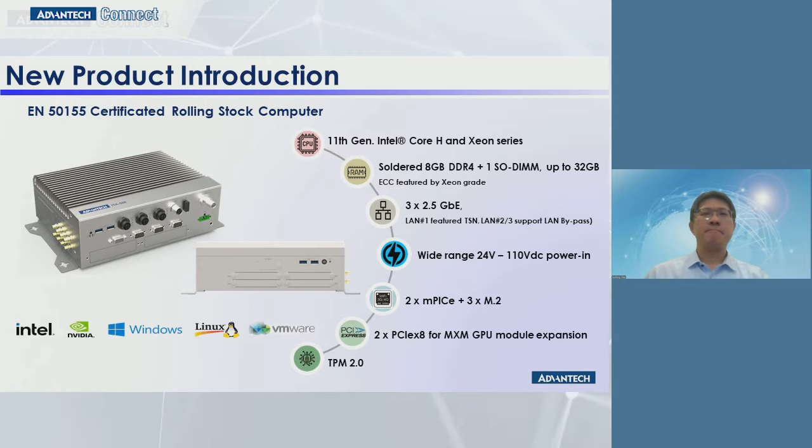Additional innovation is that we create an optional power backup module with supercapacitor to support certain power interrupt and safety system shutdown. This supercapacitor power backup solution can provide benefits on operating temperature and low maintenance cost.

From the operating temperature point of view, the whole system embedded power backup module can still comply with the EN 50155 regulations. Supercapacitor battery has features including fast charging and higher charging and discharging cycles to reduce the maintenance cost and provide better management for EN 50126 RAMS.

Railway operators adopt AI technology in order to enhance safety and operational efficiency. We will target three major solutions in rolling stock, including autonomous train, Internet of Trains, and people counting. The people counting market has seen high growth in recent years.

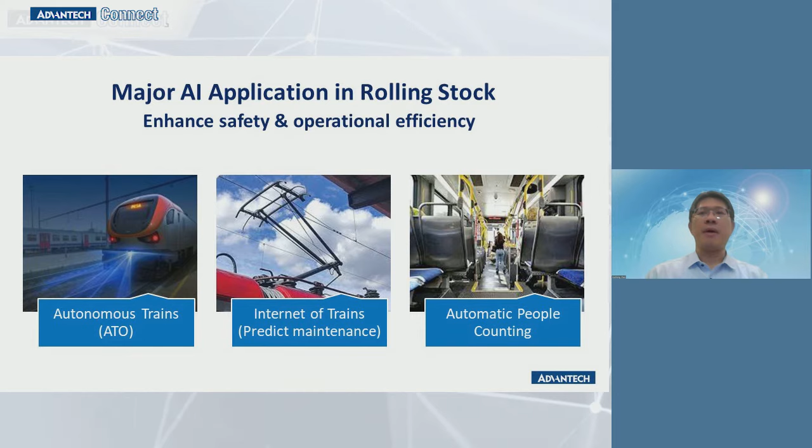People counting systems maintain the occupancy limit for social distancing due to the outbreak of COVID-19. The condition-based maintenance of wheel, track, and pantograph also helps optimize asset management. AI technology is starting to break away from static rule-based programming inference systems, using dynamic learning for smart decisions.

Advantech AI technology combined with IoT technology is now redefining smart rail applications. Edge computing offers a big advantage in distributed architecture, handling large volumes of real-time data. Moving all the data into the cloud or server for analysis creates networking and storage challenges, impacting both bandwidth and latency.

Localized processing close to the data source, such as pre-processing with AI, can reduce those bottlenecks, lowering the networking and storage cost.

In AI edge GPU solutions, Advantech offers two kinds of solutions. First, Intel Core i or Xeon platform plus NVIDIA MXM GPU solution, and NVIDIA Jetson Orin solution. We offer ITA 560 and ITA 510 for AI Jetson applications.

Those two models are powered by NVIDIA Jetson Orin NX, with built-in vehicle communication bus such as CAN bus or MVB bus, and wireless connectivity including 5G and Wi-Fi 6 technology.

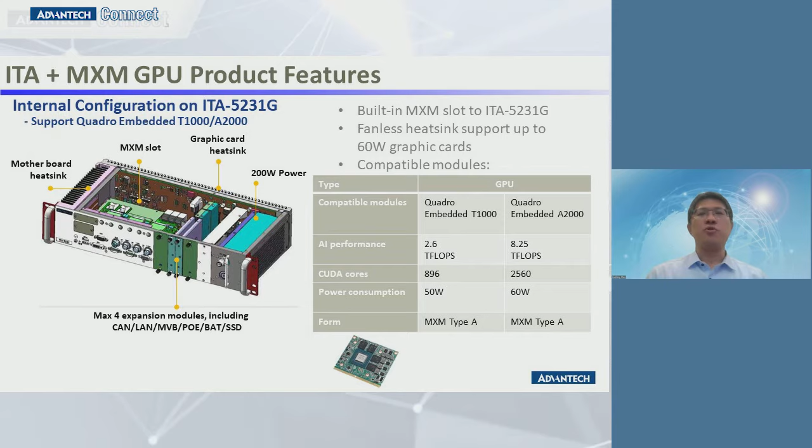Today, we will share two success cases with AI applications. One crucial part is the pantograph-catenary resistance, which is directly related to the power supply safety of the train in high-speed rail. To ensure the safety operation of the pantograph-catenary system and eliminate hidden dangers during power supply to the train.

In China, an automated detection and monitoring system of the pantograph-catenary in high-speed rail will be deployed to timely discover and report potential issues and evaluate the performance of the pantograph-catenary system. They call this the 6C system.

The 6C system can measure the dynamic and static geometric parameters of the catenary and detect the different working states of the components, and the operation condition of the pantograph-catenary system, to ensure safe and reliable operation of the railway system.

This requires AI-based image processing capacity, and compliance with railway regulation is important for solution deployment. Advantech can provide Jetson platform and Intel plus MXM GPU platform certified for this application.

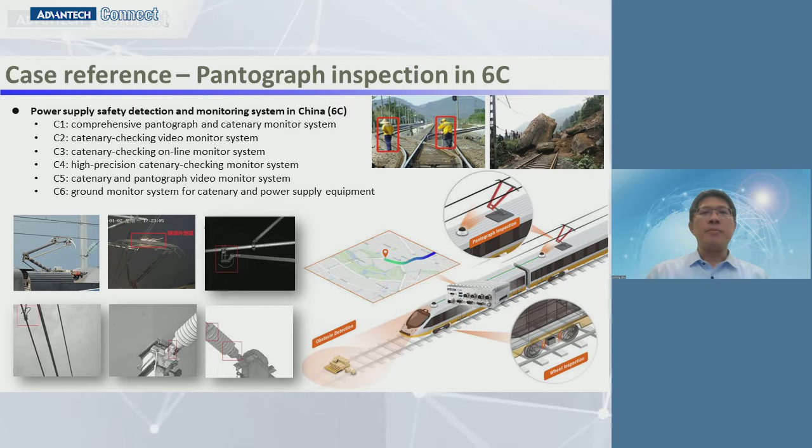For the second success case, a traditional people counting system is bundled with a door system, and its purpose is to calculate passenger volume and those getting on or off.

They usually use sensor technology to implement this on the door system, but it is hard to get awareness of the crowd data in each carriage.

Operators can pick up the easy way to upgrade the system with these features. First, there are CCTV systems in each carriage, and operators can leverage existing infrastructure equipment. They just need to use the onboard AI box, making it easy to adjust the algorithm to provide new services to passengers.

For example, in Taipei MRT, there's an app feature that shows how crowded your train will be. Through this app, you can see how crowded the next train is in real time. Crowd data is displayed for each individual car on the train, so you can avoid the most packed carriage, helping riders maintain social distancing.

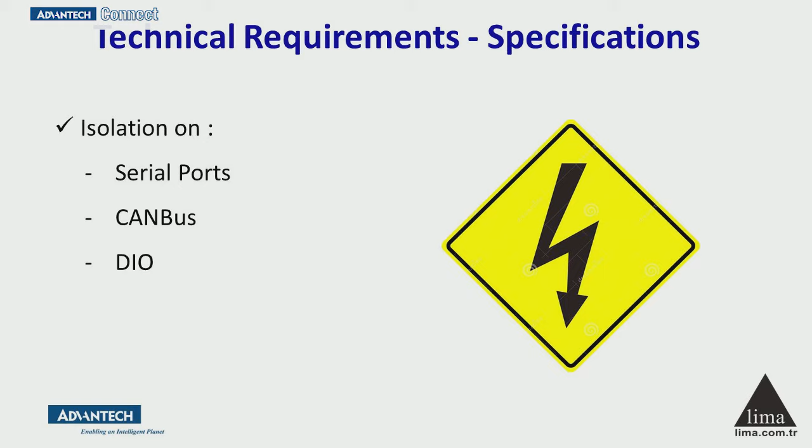As you know, reliability is perhaps the most important consideration in transportation applications, because equipment failures may cause catastrophic results. Linked to that fact, you will also see isolation is required for the communication interfaces. This is to prevent a direct electrical surge or transient power from damaging your system.

Especially for rolling stock applications, commercial connectors for the interfaces are all replaced with circular M12 connectors. M12 connectors are much more robust in harsh environments with high shock and vibration, and they also prevent dust and liquid from penetrating through the interface connectors.

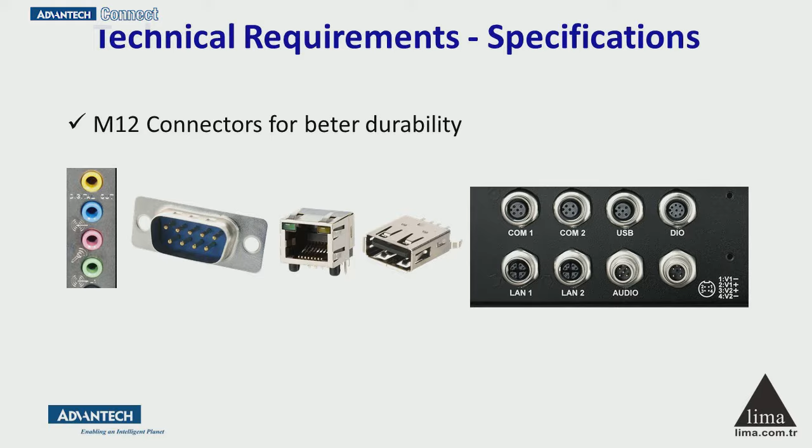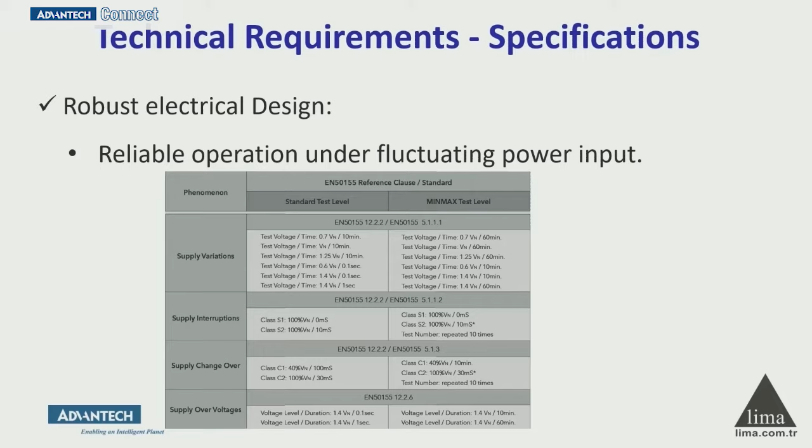The next one is the electrical design. The supply conditions in a motor vehicle or rolling stock vehicle are not as stable as in a typical factory environment. Therefore, the electrical design of the systems should be able to withstand supply challenges like fluctuating power input. For instance, in rolling stock applications, the systems should be able to operate between 0.6 to 1.4 times the nominal input voltage. In addition to fluctuations, supply interruptions for a certain amount of time should also be tolerated.

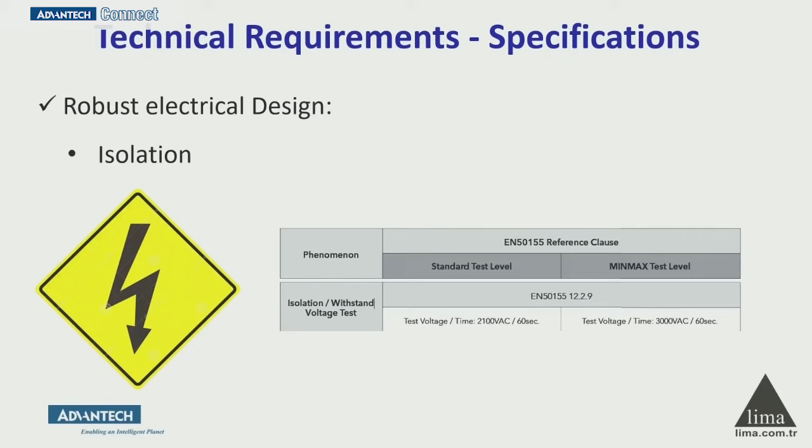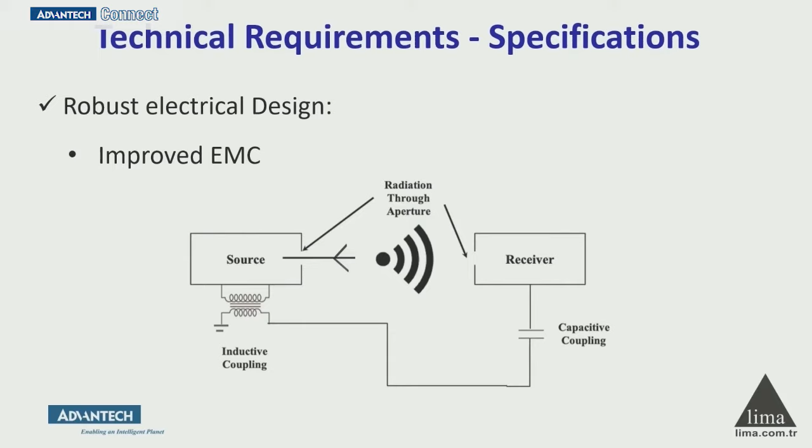Just like the interfaces, the power subsystem should have robust isolation in order to protect itself from power surges. The power module should not emit EMI in excess of defined levels and should be protected from outside negative effects as well. All these design requirements are explained or standardized in widely accepted standards like EN 50155.

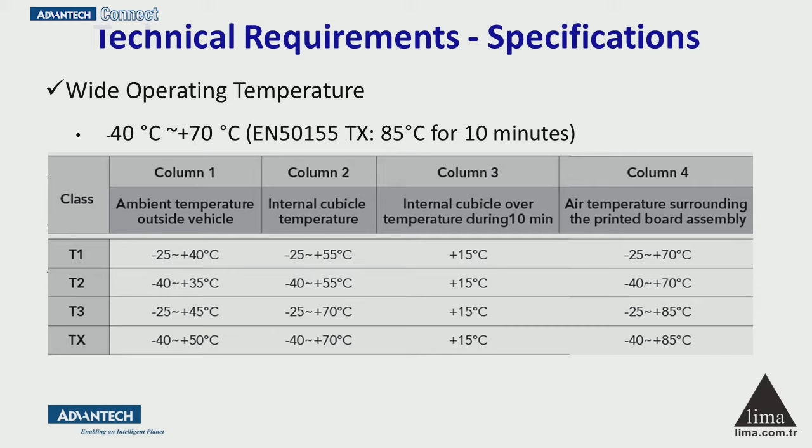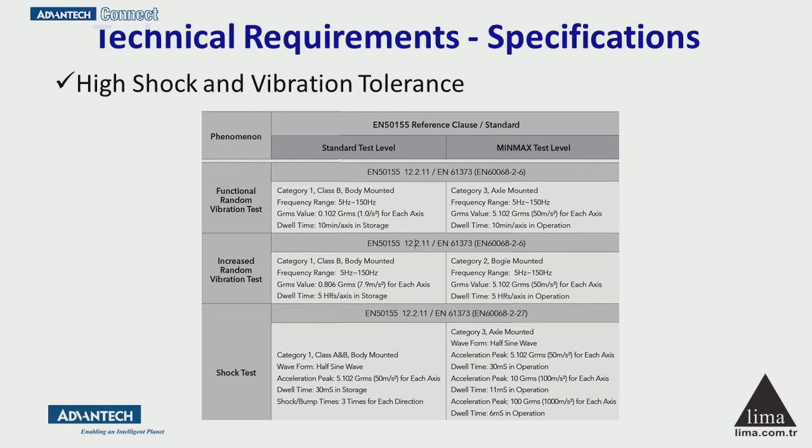Obviously, the devices should be able to work in extreme high and low ambient temperatures. Typically, they are expected to operate between -40 to +70 degrees. High vibration and shock tolerance is also a must, and the devices are tested against certain shock and vibration profiles to get certified. In addition, some special functions like programmable HMI buttons could be requested.

Finally, SDK availability for low-level access to interfaces like digital I/O and CAN bus, etc., and programmable functions like brightness adjustment, on and off delay control, function assignment to buttons is quite important during the product qualifications.

And the last but not the least is the certifications. The main ones here are EN 50155 for rolling stock and E-mark or E13 for motor vehicles. Apart from these two, typically most or all of the remaining certifications are also demanded. In summary, having the certification and test reports for the above standards means that the device you offered meets the unique electrical and environmental requirements of the application.

When it comes to the business side or project management side of things, early engagement is critical. There is almost no chance to win a project or tender if you only hear about it at the procurement stage. Due to the nature of the applications, the demands and the regulations are so strict. Therefore, the engineering teams prefer to thoroughly test and qualify the candidate products to make sure they meet all their needs. You should be prepared to invest in mid to long-term pre-sales support, because the qualification period could take anywhere between 6 months to 18 months.

Typically, a free of charge demo unit should be given, and the qualification should be followed up very closely for timely resolution to any reported issues. Of course, Advantech is your main help here. The dedicated PM and the engineering teams will evaluate the reported problems or even the customization requests and provide your client with a timely solution.

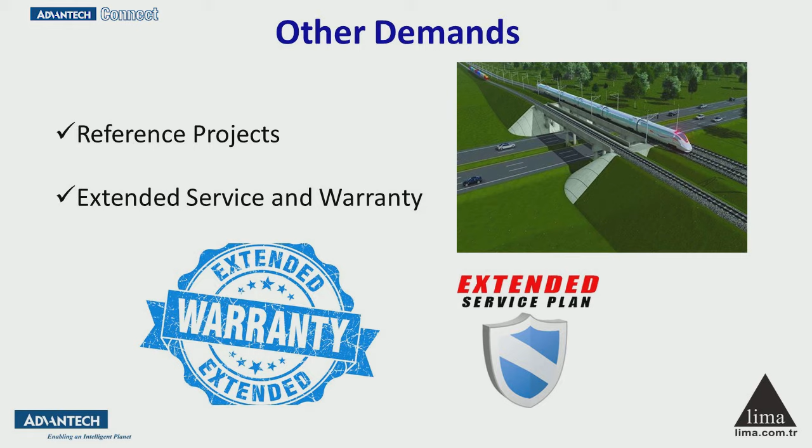And the next one is the long-term service and warranty requirement. Especially for rolling stock applications, it is quite common that you are asked to commit to a minimum of 10 years service guarantee for the products. In addition, usually a minimum of 5 years warranty is also requested. You can usually buy extended warranty and repair services from Advantech with an additional cost, and you can also charge your client accordingly.

Finally, after having passed all the hurdles, if you manage to close the deal, there will be 3 rewards. First, you will secure a long-term business which continues generally for 5+ years with additional purchases for new lines, for capacity expansions, etc. Second, you will always be considered a strong candidate for new projects from the same client. And finally, you will have a good reference to share with other clients, which increases your chance to win new projects.

Now, I would like to briefly mention a recent rolling stock project where we succeeded in selling Advantech rolling stock HMIs. Here, you can see the actual specifications released in the tender document.

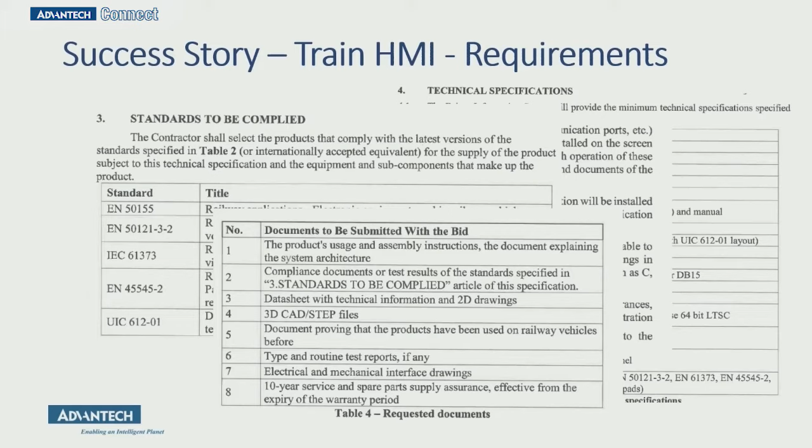As you can notice, almost all the requirements I have described so far are mentioned in detail. We were able to win this tender with Advantech ETA8100 rolling stock HMI. We have engaged with the client at the beginning phase of the project, provided the engineering team with a demo device, and closely monitored the qualifications.

During this time, with the help of our friends in Advantech, we proposed solutions to all the problems they have encountered, such as brightness adjustment, customized BIOS and SDK usage, etc. The qualifications took almost 1.5 years until the tender was finally announced. All of the requirements in the tender documents were met by ETA8100 HMI, mainly because of our early engagement.

If we had known about this project only when the tender was announced, we would have quite possibly missed a few requirements, since they would have been formed by taking another device they tested as reference. The procurement took almost 3 months. Along with our quotation, we have supplied all the certifications, reference project details, and also committed to the extended service and warranty as required. As a result, we have been rewarded with the deal and added a new reference to our achievements in the sector.

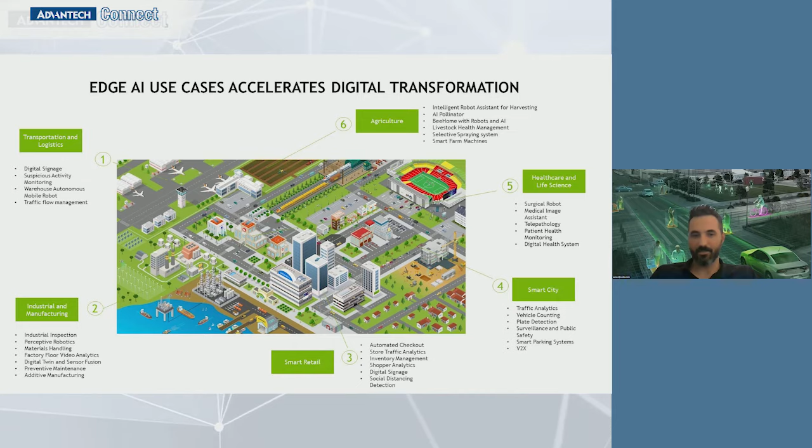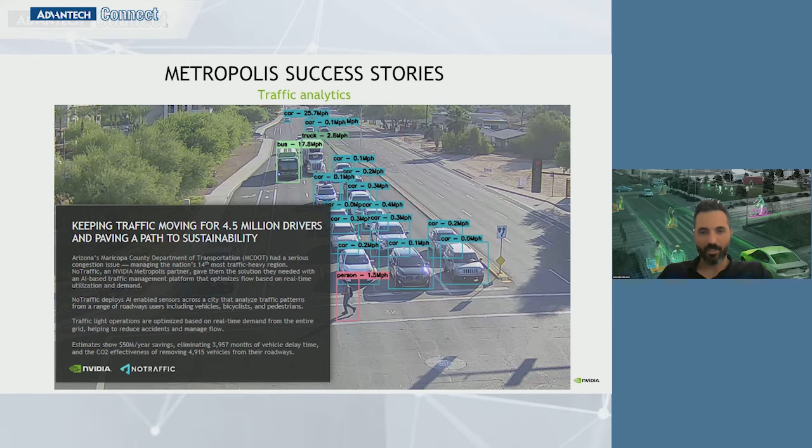So first of all, Edge AI is used in many verticals, very important in the transportation use case. There are many success stories with Metropolis partners that already do traffic analytics for traffic management and traffic optimization, sites with situational awareness. There's Inex Tech doing toll road monitoring, WeSmart, and an Advantech partner that already does license plate recognition for many use cases.

So a little bit about NVIDIA Metropolis. NVIDIA Metropolis is about product enhancement, business development, and marketing. Teams of NVIDIA working globally to accelerate video analytics, go-to-market, and applications. So I really recommend leveraging, first of all, our SDKs, which I will elaborate more in this session, and business development and marketing.

So today, if you want to develop an AI application, first of all, you need to get data. So there's the synthetic data option with Omniverse Replicator. You can use pre-trained models from NVIDIA, free of charge from NGC, NVIDIA GPU Cloud. Train them with the TAO toolkit, a tool from NVIDIA for accelerating model training, and deploy to the edge device with DeepStream or Triton, which are very efficient SDKs for inference.

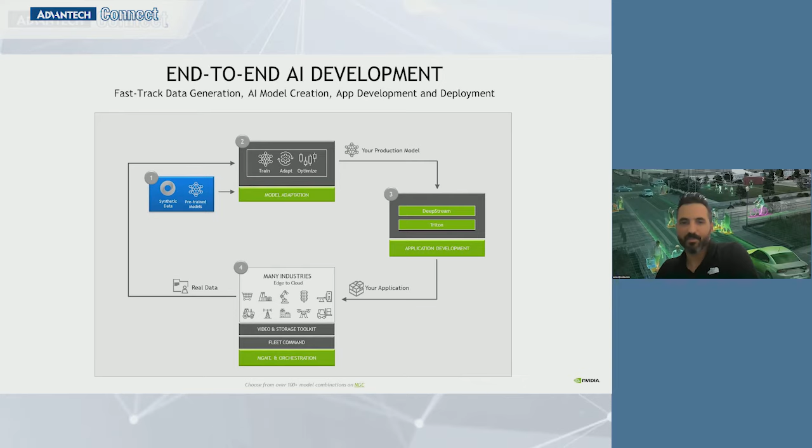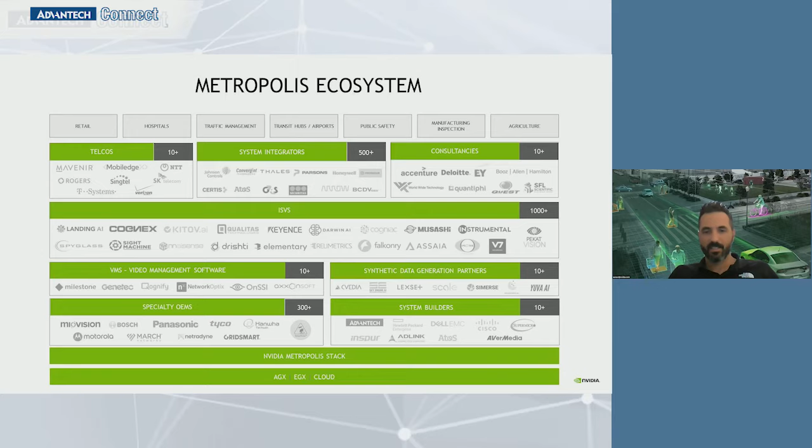Deploy and also use the video storage toolkit to integrate with the video cameras, stream video, store video, which is an important thing that you don't want to implement on your own, of course. Apart from that, we have a very strong ecosystem, including SIs, telcos, hardware vendors, and camera manufacturers. So really, I recommend joining Metropolis if you're doing video analytics and leverage all of that value.

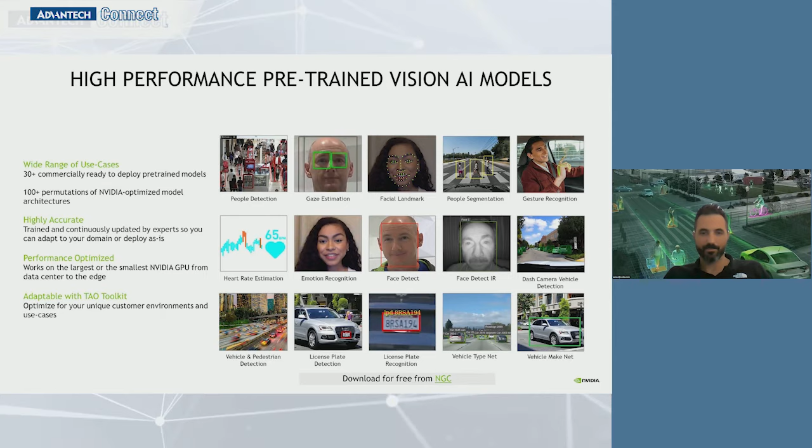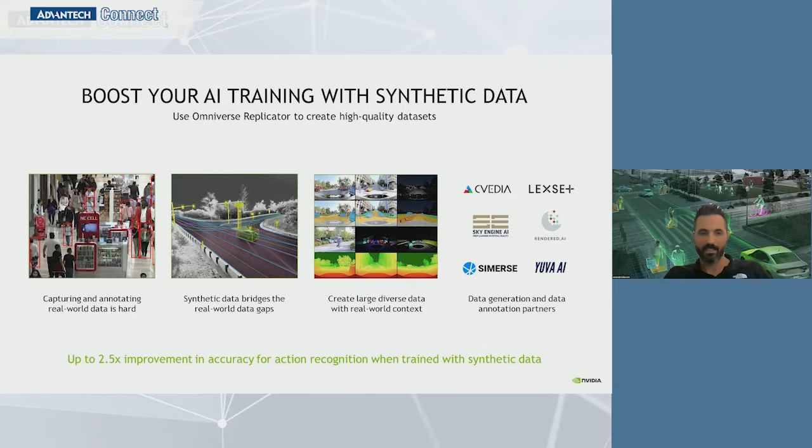Pre-trained models. We have many pre-trained models also for traffic, license plate detection, recognition, vehicle type, vehicle make, and pedestrian. You can train that with TAO toolkit, get a very efficient model quickly with quantization-aware training and pruning. Use synthetic data with Omniverse Replicator to generate data. Utilize video storage toolkit to integrate the edge device, detect video cameras with ONVIF, stream video over WebRTC, stream video into DeepStream for video analytics.

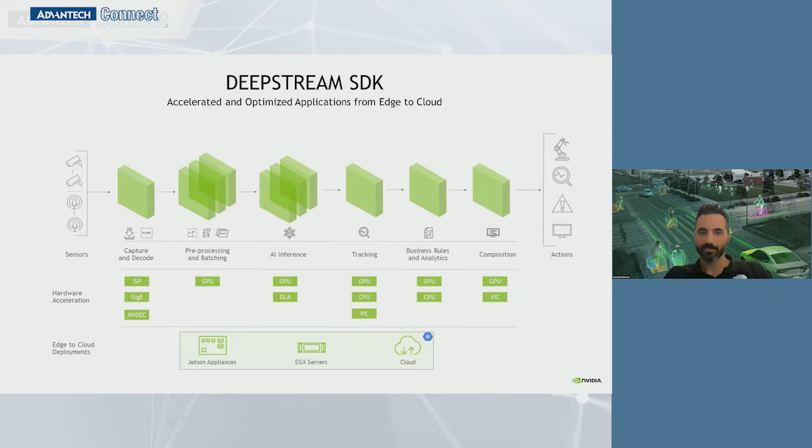DeepStream is a very efficient SDK for video processing, utilizing hardware acceleration for every stage, including the deep learning accelerator of the Jetson. Advantech already announced its support for the latest Jetson Orin family. So as you can see, there are many devices with many interfaces that you can utilize. This is a huge jump in performance.

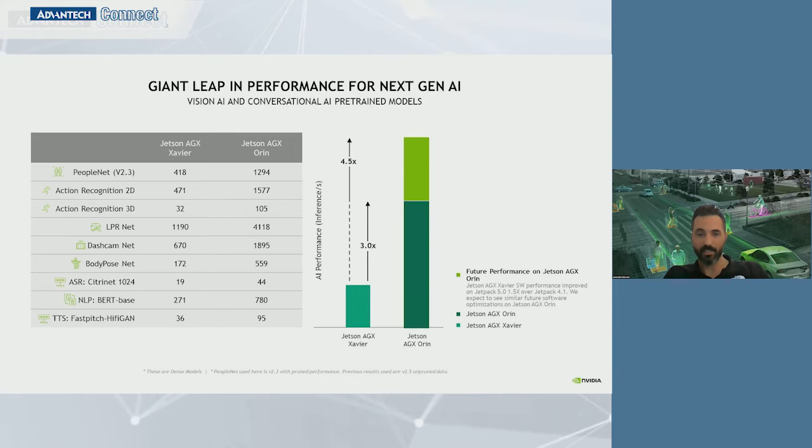If we look at the pre-trained models, this is the list of pre-trained models on the left here, and the frame rates, you can see a huge jump in performance. In the use case of DashCamNet, detecting vehicles, it's almost a ×3 acceleration. Jetson Orin Nano also announced recently. Again, huge jump in performance.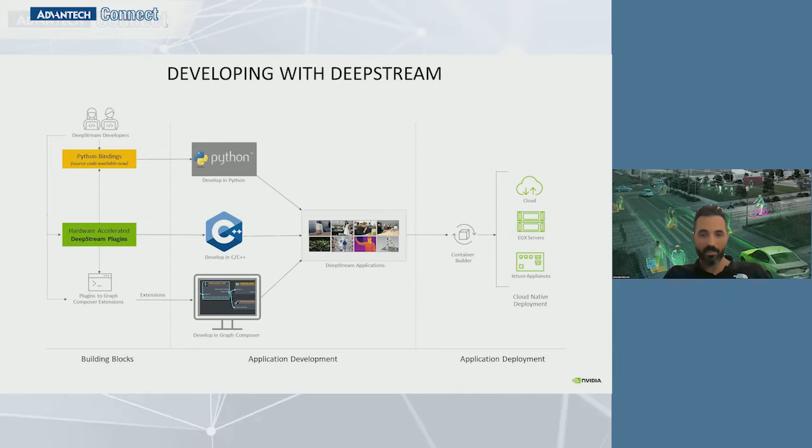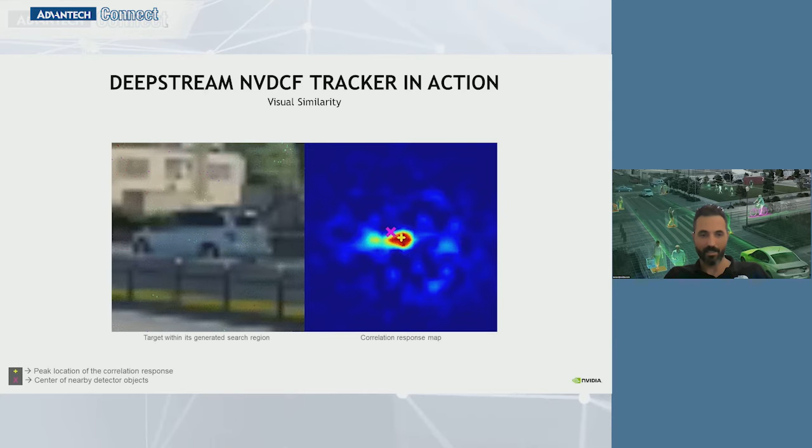DeepStream can be used with Python, C++. You can develop with Python, C++ and Graph Composer. We also have a very good visual tracker. You see the white vehicle here. I'm jumping because I don't have time, but really, you can see the tracker does a very good job tracking this vehicle even after it's getting distant and far away.

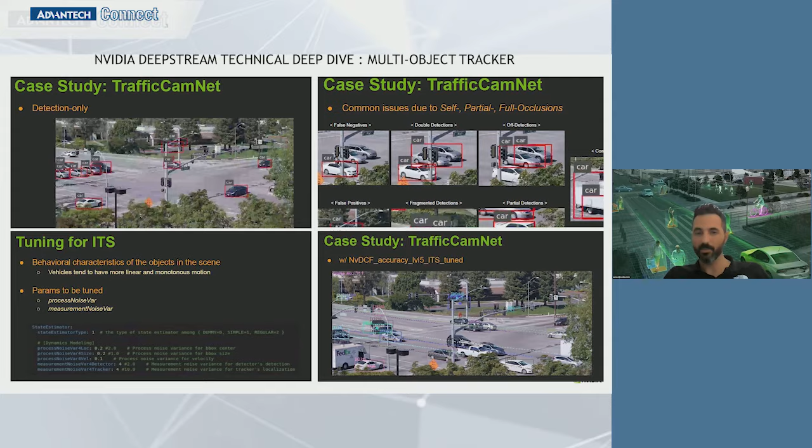We have a deep dive session specifically on the trackers, specifically on optimizing the tracker for traffic analytics, and many repositories also with the TAO integration, DeepStream and TAO integration, occupancy, dewarping, which is also an important task.

So call to action, I really recommend using the pre-trained models. We have them available on the NVIDIA GPU Cloud for use. You can use TrafficCamNet, license plate detection, license plate recognition, and more. Train that with TAO toolkit to get the best performance model ready for edge deployment.

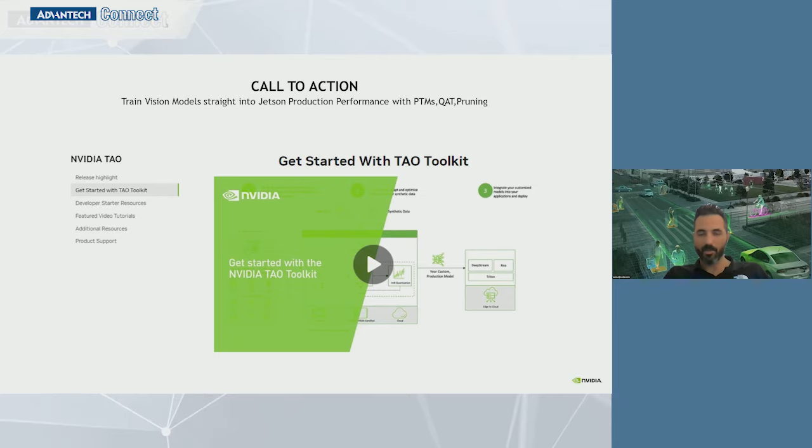Also deploy the resulting model to DeepStream, the Video Analytics SDK, for best performance. Minimum, zero GPU-CPU copies, memory copies. So this is a must for edge deployment.

VST, register to the early access and start using that. You don't need to implement ONVIF discovery on your own, and video recording and UI. We have it all ready and free to use on the Jetson NX, AGX, and Orin.

Use the Metropolis demo. Learn about Metropolis microservices. This is a demo of tracking across multiple cameras, which is also very important for traffic analysis across the city.

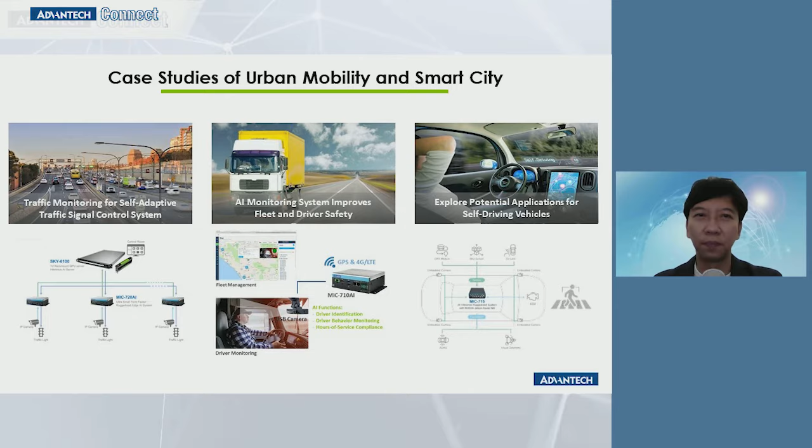Learning from these case studies, we have 5 key technologies that impact Edge AI deployment. To facilitate AI deployment, we have to consider environmental conditions, integration flexibility, sensor and acquisition, system security, and OOB and OTA remote management. Once you have a great plan for these 5 points while you choose hardware, your project will go much more smoothly.

The very first one is environmental conditions. In edge computing, we cannot expect the operating environment. In mission-critical applications, the system also has to withstand vibration, water, dust, and many other things in the environment. Therefore, these conditions need to be taken into consideration while you design an Edge AI project.

Let's take a roadside system as an example. The temperature and the humidity might change a lot. Sometimes it's raining, sometimes it's snowing, sometimes it's working all day long at over 50 degrees Celsius, right?

We can even support customers to build a NEMA TS2 system. The system has to pass the wide operating temperature from -34 degrees Celsius to 74 degrees Celsius. Next time, when you stand at an intersection, maybe the camera is doing AI inference with an Advantech AI system.

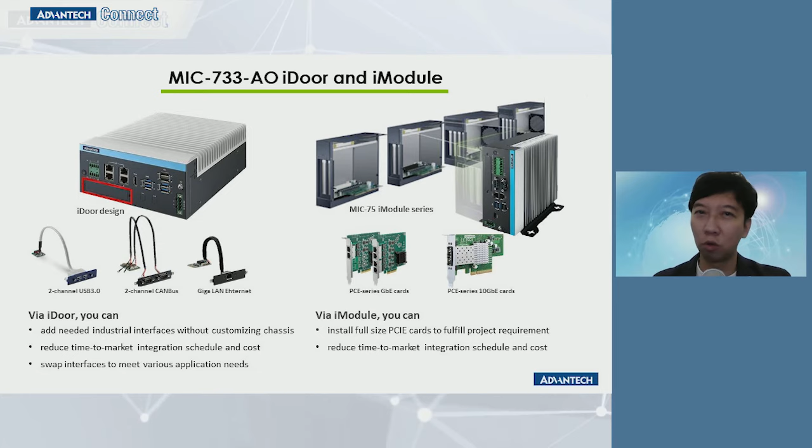Moreover, we also leverage Advantech proprietary design iDoor and iModule to extend the possibility for more integrations. iDoor is better for mini PCIe and M.2 add-on cards. But if you want to install a whole PCIe card, iModule would be your best solution. iDoor and iModule can shorten your development schedule and reduce customization cost. Most important, both can make go-to-market much easier.

Then, the different requirements of video sensor and acquisition depend on the applications. For traffic monitoring and law enforcement, you want to have as many channels as possible, right? And the resolution high enough to recognize license plate numbers. In smart city, we could use IP cameras or CCTV cameras to do traffic monitoring or law enforcement. For IP cameras, you might need PoE. For analog CCTV cameras, a capture card is needed. So you could even use these two interfaces at the same time on Advantech systems.

Needless to mention, system security at the edge will be a top topic very soon. Advantech MIC AI series is well prepared for your security needs, from hardware to firmware to software, even to the network and cloud communications. Secure boot is an essential function that we could work with customers to build systems with protection. TPM and fTPM are getting more and more important on edge systems. Advantech has both solutions for customers to choose. Regarding cybersecurity, we work with Trend Micro to provide TMIS function to protect the systems from cyber attacks.

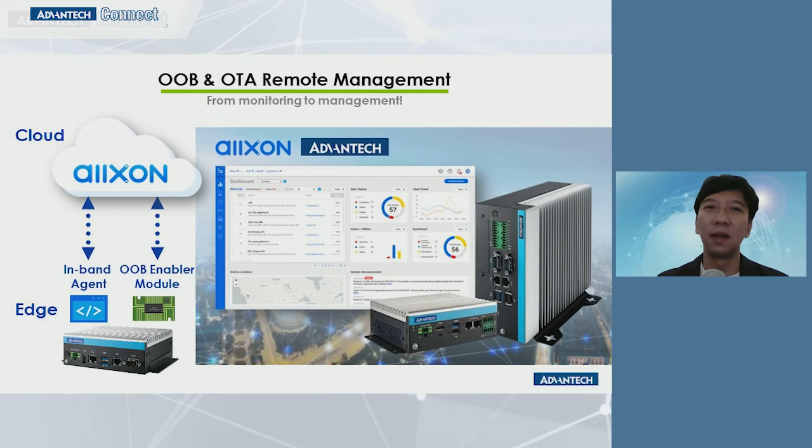In edge AI projects, there might be hundreds or even thousands of systems deployed at the job site. How could you monitor device status? How could you do OTA upgrades? How could you manage the AI models and collect data from the system? We have received lots of inquiries about remote management. Then we figured out that a cloud service is needed for our customers. Advantech collaborates with Allxon to provide in-band and out-of-band OTA and OOB remote management. Even more, BSP refresh management has also been done by Allxon with Advantech on the MIC AI series. If you are a project owner, you have to think about remote management at the very beginning.

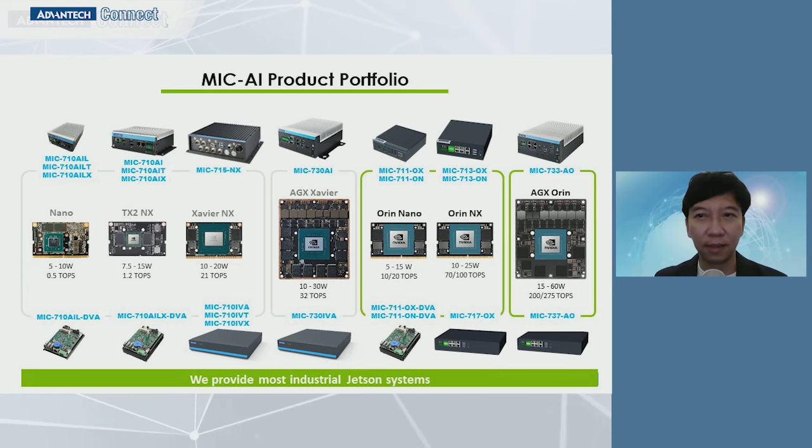Here is the MIC AI product portfolio. On the left side are MP products from Nano, TX2 NX, Xavier NX, and AGX Xavier. On the right side are the next generation products based on Orin Nano, Orin NX, and AGX Orin. From now on, we will focus on Orin products. Since there are more and more AGX Orin system MIC-733AO inquiries, I'm happy to let you know that MIC-733AO is sample ready for order. If you are interested in this system, please contact your local sales for more information.

We know landing AI is not easy and cannot be done by a single company. We always need more AI eco-partners to penetrate different vertical AI applications. No matter if you are an SI or ISV, a startup or big company, don't wait, just contact Advantech. Let's come together, become stronger.

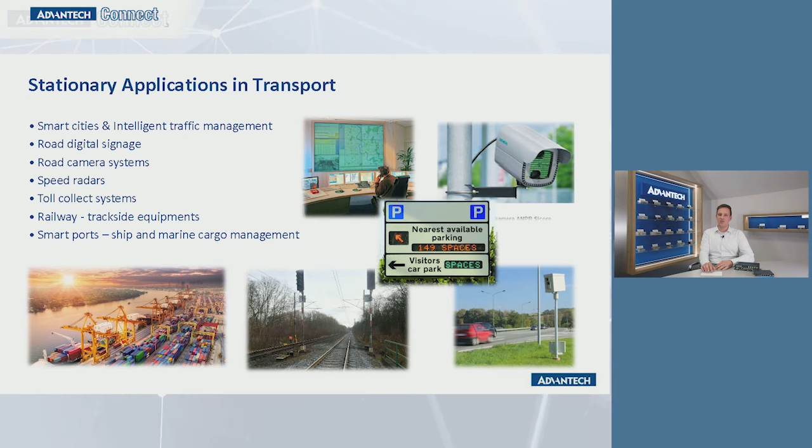So for those applications, there might be a case where wires can be used, when the devices can be connected by wire. So focusing on devices that need to be connected by wireless technology, I will introduce three cases. The first case we have here is the bus gateway. Here we have our ultra-high-speed 5G device ICR-4453, which is also used in the other two applications.

This router gateway is connected to the 5G network with fallback to LTE technology, when 5G is still not in place in some rural areas. The gateway also offers Wi-Fi for hotspot connectivity, so passengers can connect with their handheld devices, whether it's a phone or a laptop. Then the other connectivity is Ethernet for the infotainment system. We also have Ethernet for card readers for payment management.

And we have GPS positioning to see where the buses are, together with information about the number of passengers on board. Very useful information for the cities, how the traffic flows and where most of the people are. And obviously the gateway supports Power over Ethernet Plus to power cameras for security reasons, so the operator can see what is happening in the field.

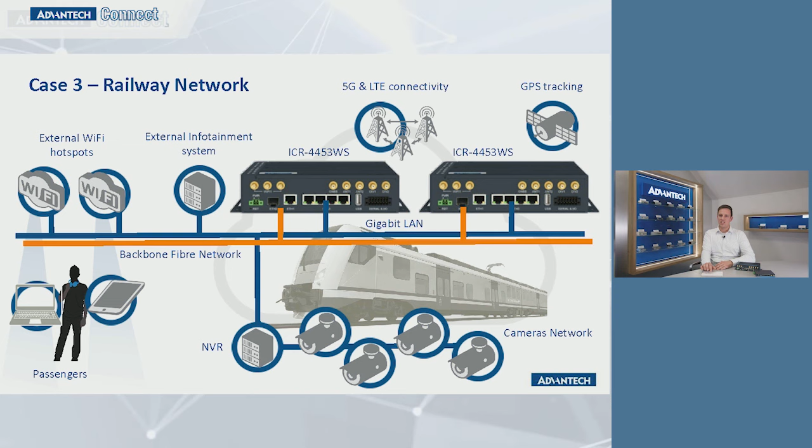On board the train, we have the NVR system with all the cameras for safety and management. And usually there is a need for backup in communication. So it's not only wireless, but there is also the gigabit LAN network inside the train. There is a backbone fiber network, and as a backup, there is 5G and LTE connectivity. Again, GPS tracking is one of the musts.

So looking at the gateway itself, which we also have here, it has advanced security, advanced networking, and it can host various third-party software to connect with whatever application you have and need to use. It has a lot of horsepower. It can host an SD card. It can operate in a high temperature range, and it has a very robust design to withstand very harsh environments.

From a connectivity perspective, we have Wi-Fi, 5G connectivity, and SIM slots for 2 SIM cards, and it can also be equipped with an eSIM. From terminals, we can connect fiber and 5 gigabit Ethernet ports, where 4 are equipped with PoE+, and we obviously have a USB port. The serial and CAN port is right here, and it can be easily wired in the field.